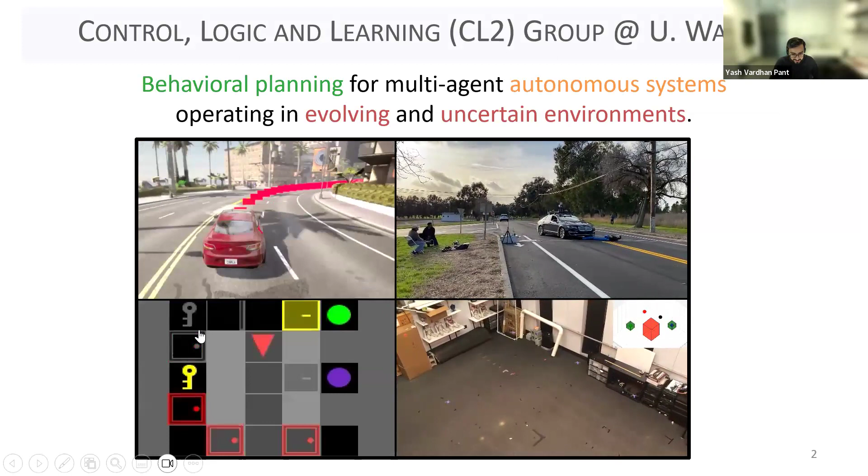As Rahul said, I run the Control, Logic and Learning group—the order of the L's doesn't matter—at the University of Waterloo, where we focus on behavioral planning for multi-agent autonomous systems with complex objectives, operating in evolving and uncertain environments. The video shows a few examples of things we've been working on, across three research or application areas.

Oh, I draw on tools from— sorry, your audio might be breaking up. Maybe you can check it or turn off the video. Let me see, it seems to be okay now. I'll turn off the video—is that any better? Yeah, try. Go ahead, okay.

So yeah, we draw on elements of control theory, formal methods, and machine learning to work on these three problems. Today's talk is going to be mostly focused on multi-robot and autonomous system problems.

The motivating problem for what we're looking at is the scenario of urban air mobility, this near-future scenario where we'll have hundreds, if not thousands, of manned and unmanned autonomous aircraft systems operating in dense, cluttered urban environments that are evolving and will have a whole host of rules applied on these airspaces.

In today's talk, I'll first look at how we formalize the type of requirements we expect these autonomous systems to have with temporal logics. I'll introduce signal temporal logic, and then formally introduce what the motion planning problem looks like with STL specifications. Then I'll move on to the problem of robust multi-agent motion planning with signal temporal logics—how do you actually solve this motion planning problem.

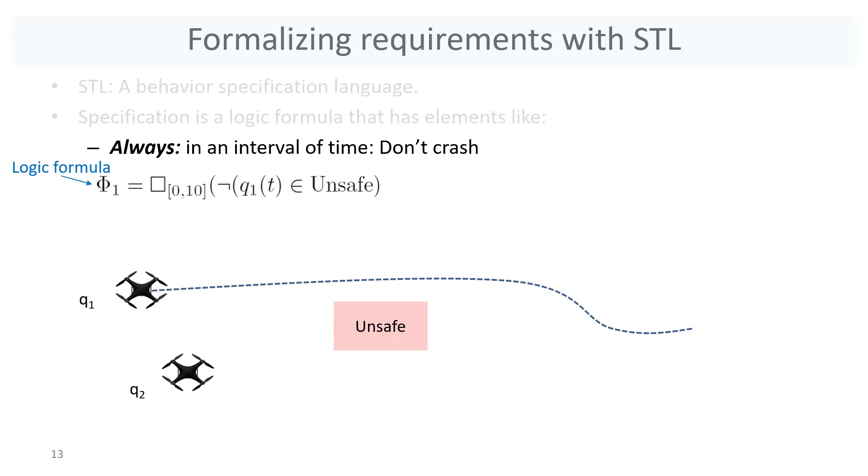Let's say their positions are Q1 and Q2, and my requirement is that I don't want them to crash. I can encode that using the always operator in STL. So a logical formula phi1 that at the end of the day will evaluate to either a Boolean true or false. In this case it's evaluated based on the always operator, which is active in a time interval of 0 to 10 seconds, where I'm saying that I do not want, so that's the logical negation, the position of quadrotor 1 to be inside the unsafe set.

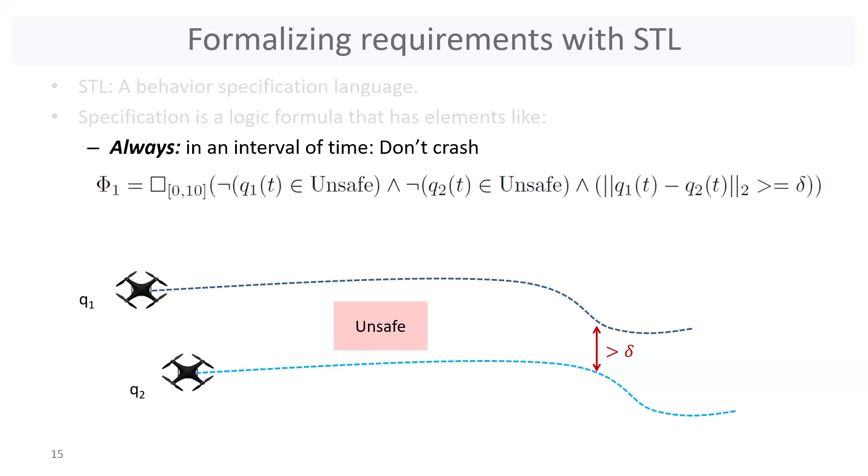This notion of a position or a variable being inside a set or meeting some inequalities is what we call an atomic proposition, the smallest building block of an STL specification. I can also say the same thing for the second quadrotor by using the logical and, or conjunction. And I can also encode requirements such as that I don't want these two quadrotors to be any closer than delta meters to each other. So we can encode safety requirements pretty naturally in STL.

You can also have requirements that require the robot to do something more than just being safe. For example, with the eventually operator, we can say things like, within some time interval, I want these two quadrotors to reach a goal set. Imagine they're trying to do a package delivery type of problem, where this formula phi2 is now saying, we look at the eventually operator, again acting in the range of 0 to 10 seconds, but I want quadrotor 1 to be inside the goal.

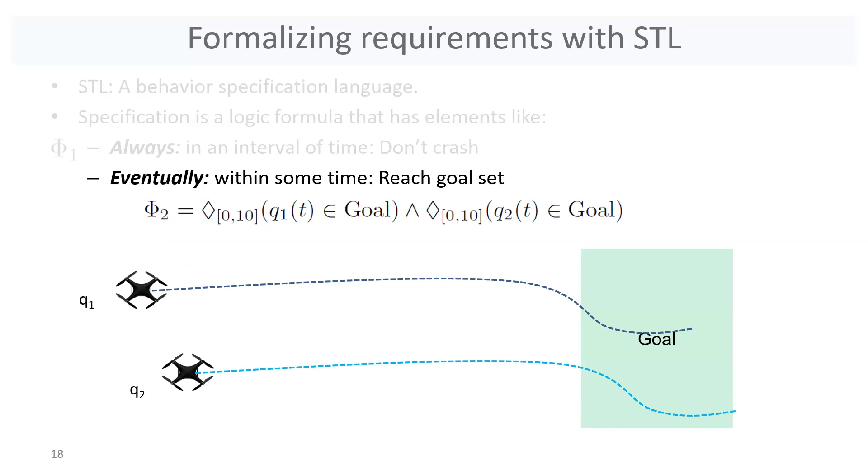And also eventually within time 0 to 10, I want quadrotor 2 to be inside the goal. So at any point in time between 0 to 10 seconds when quadrotor 1 reaches the goal, the first part of the specification is true. And similarly, if quadrotor 2 reaches the goal at any point within 0 to 10 seconds, the second part is true. The logical AND of them will result in the entire specification being true only when both robots hit the goal set. We can also have if-then type of requirements in STL.

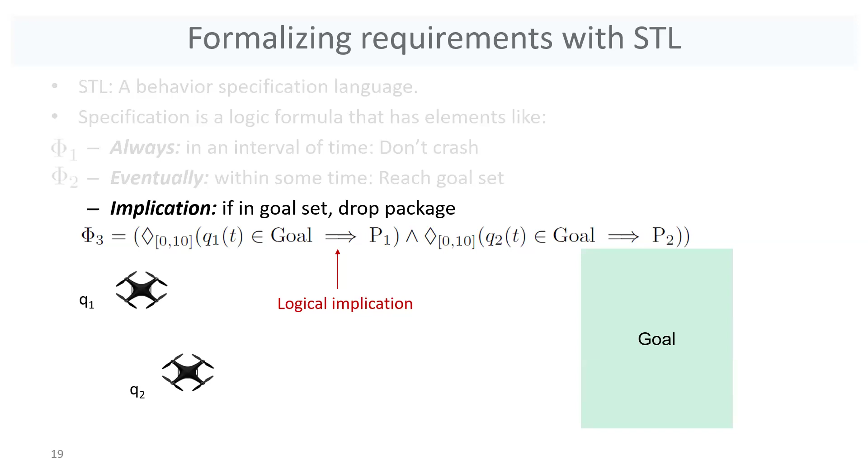Shown over here is an example of using a logical implication, which says eventually within 10 seconds, quadrotor 1 being inside the goal should imply that it's dropped package P1. And similarly for the second quadrotor.

Now in STL, we can take these individual specifications, put them together, and we can nest operators. We can do a whole lot of tricks, and we'll see a few examples later on. But let's say I put them all together using the logical AND. So I get a mission that says, be safe, reach a goal set, drop a package when you get there. That's the specification phi, and the specification has a time horizon to it. For each of these operators, you would have noted that they were active between a time interval of 0 to 10 seconds.

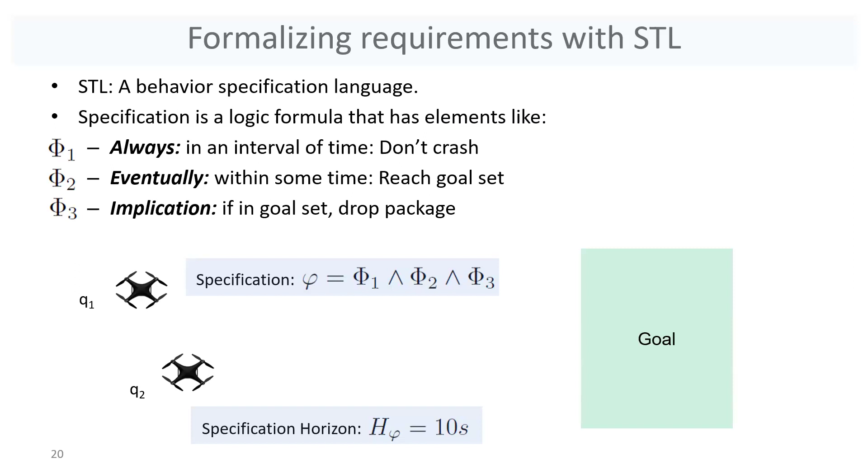So I have a specification horizon of 10 seconds, which means I need two quadrotor trajectories of duration at least 10 seconds before I can evaluate the specification to be true or false. So that was a quick introduction to how signal temporal logic can be used for reach-avoid type problems.

We'll of course look at richer problems later on, and in fact STL can encode a whole lot of complex behaviors very naturally. But now let's assume we know how to encode our requirements in STL. The question is, how do we make these robots actually satisfy these requirements? That's our motion planning problem.

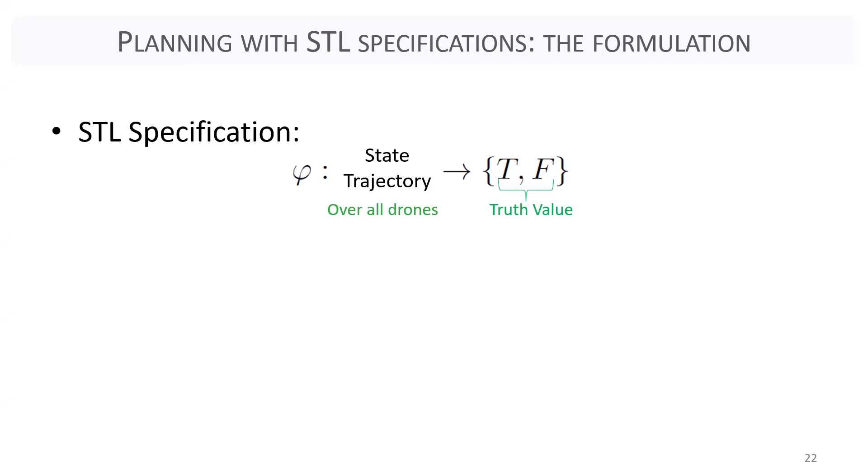So an STL specification, if we were to think about it as a function, it takes in the continuous, real-valued trajectories over all UAVs or all autonomous agents and maps it to a single Boolean true or false value. True if all parts of the specification are satisfied, otherwise it's false.

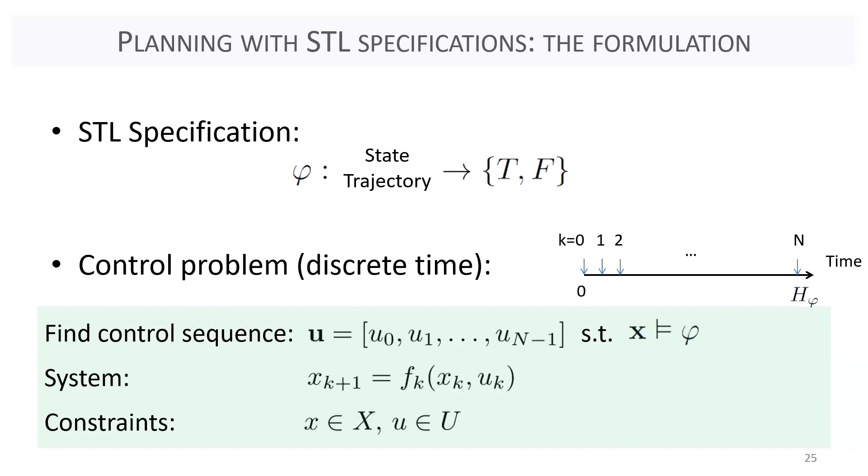Our control problem then can be thought of as a finite horizon discrete time problem, where I take my specification horizon from, let's say, 0 to 10 seconds, as in the previous example with two quadrotors, and I discretize uniformly in time. What I want then is a feasible solution to this problem, where I want to find a sequence of control inputs for each of my robots such that the resulting trajectories over all of these robots satisfies the STL spec, or the STL spec evaluates to true. So that's what that notation is saying.

Of course, I want to make sure that I pick those controls such that the trajectory respects the UAV dynamics. There's no point picking controls that the robots can't actually fly out. And also, I want to do this while respecting constraints on the system, such as robots having a maximum thrust, maybe upper or lower bounds on velocity, accelerations, orientations, and so on.

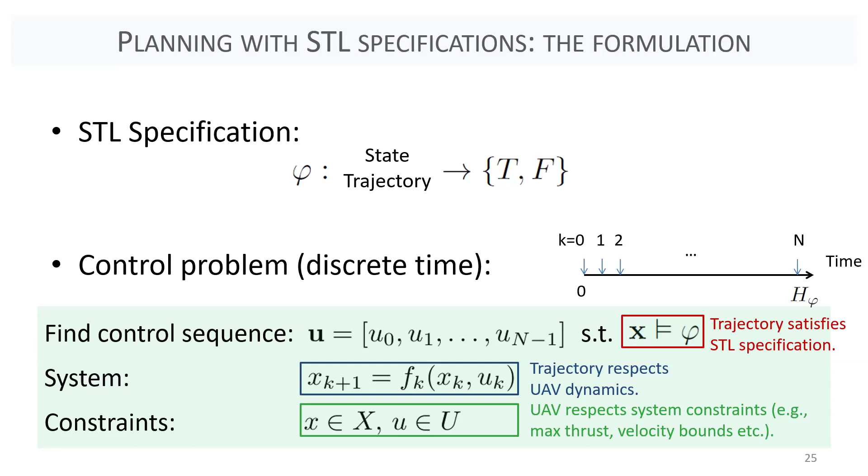So if I can find a solution to this problem, I've solved the problem of generating trajectories that satisfy STL specs. But of course, the challenge is how do you encode this particular problem in a way that it can be solved efficiently? In order to take a look at that, we'll have a very coarse-grained look at some of the related work.

So the most popular line of work in coming up with controllers to satisfy STL specifications is to turn the problem into a mixed integer programming one, where the idea is you introduce binary variables for the smallest building blocks, or the atomic propositions, that say whether a state was inside a set or not. Then there are ways of automatically generating mixed integer constraints such that if you satisfy those constraints, you've satisfied the underlying STL specification. One of the challenges is that these usually rely on mixed integer linear programming as the underlying solver, so they're restricted to linear systems.

We've shown in some of our previous work, and this is by now well known, that these methods do not scale well because mixed integer programming itself does not scale that well. And they also produce solutions that have a problem of zero robustness. We'll define robustness later on, but that makes them difficult for implementation in a realistic system.

Another way of solving these problems is to actually abstract away the continuous part of the dynamics and work with a discretized workspace with simplified motion primitives. There are challenges here as well, that these methods do not scale as you add multiple agents, or especially if you have three-dimensional workspaces. And also the type of specifications or problems you can encode and solve with these methods are relatively limited. So there are some references on this.

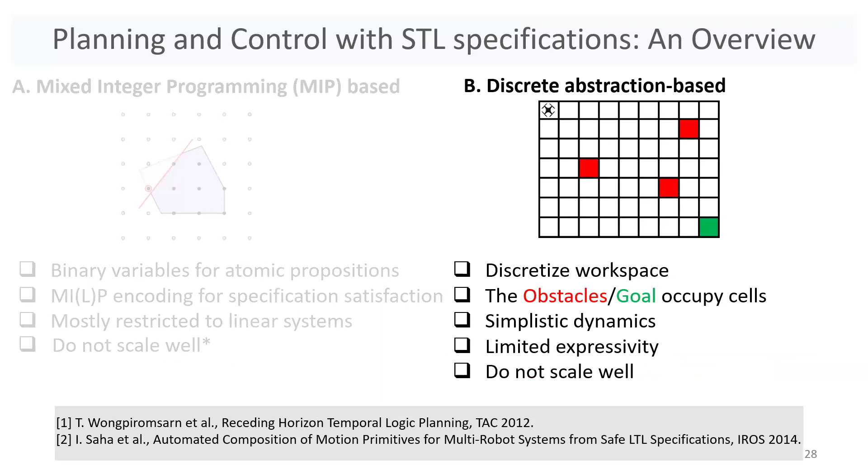So at the heart of it, the state-of-the-art approaches, or at least the most common ones, are combinatorial approaches that do not scale, and this kind of motivates what we want to do. I would be remiss if I did not talk about some more modern methods. So people have looked at solving this problem via reinforcement learning. The challenge there is that, of course, it relies on breaking the problem down into a very simple, discrete abstraction. It's also limited in the type of specifications we can have.

There are methods that can turn this into a purely convex optimization-like problem. But the challenges there are that they again rely on high-dimensional polyhedral projections, which means if you have a complicated specification or a long time horizon, these methods just don't work computationally.

At this point, I think the methods finding the most applications in this area are based on control barrier functions. But their limitations are that first, they rely on handcrafted control barrier functions, and also they're limited in the grammar of STL or the types of specifications we can encode or solve for using control barrier functions.

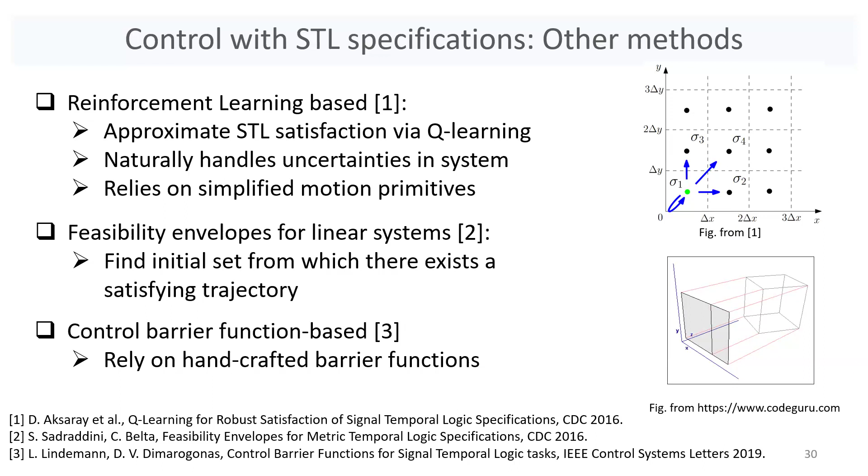So anyway, with that, we can move on to the core idea behind our approach, which is that instead of solving a combinatorial problem like a mixed integer program or a graph search or finding a policy over an automata, what we want to do is solve a continuous optimization problem.

And in order to do that, we rely on the notion of the robustness of an STL specification. Associated with signal temporal logic, just like we have the Boolean semantics that map a trajectory to true or false, we also have robust semantics, which rather than having a discrete outcome, gives us a robustness function that can be automatically constructed from a given specification. It takes in the same input as the specification, your real valued trajectories, and maps it to the extended real line.

This mapping has a nice property: if the function evaluates to a strictly positive value, it means the underlying specification is satisfied. Otherwise, it's not.

So we're going to rely on this notion of STL robustness, which we can also interpret as a degree of mission satisfaction. So if you have large positive robustness values, it means you can tolerate a lot of deviations or disturbances at runtime, for example wind or even small failures.

On the other hand, if you have very negative values of robustness, it means you've done a great job of violating the specification, which for our problem is a bad thing. And if you have robustness close to zero, then any small disturbance could make your system violate a given specification, which is usually the problem with mixed integer programming based solutions.

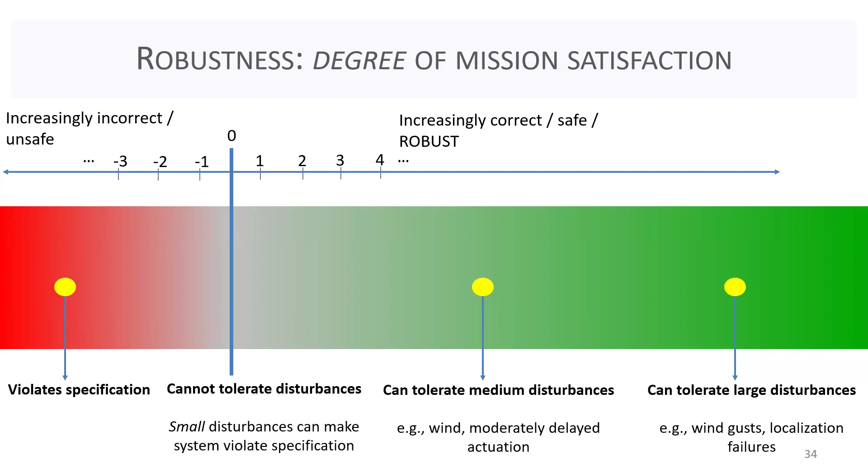Before we get into how we actually generate those trajectories, let's take a look at how we build this robustness function through one example. My example would be that of a safety specification.

So the specification says that always in a time of 0 to 10 seconds, I don't want quadrotor 1 to be inside this unsafe set U1 or to be inside this unsafe set U2. So it's a simple safety specification.

What we can also do is, following the robust semantics of STL, build up the robustness function, where based on this always operator, we have a corresponding minimum operator going over this time range of 0 to 10 seconds. Corresponding to the logical OR, I have the max operator showing up. There's a minus sign here because of the negation.

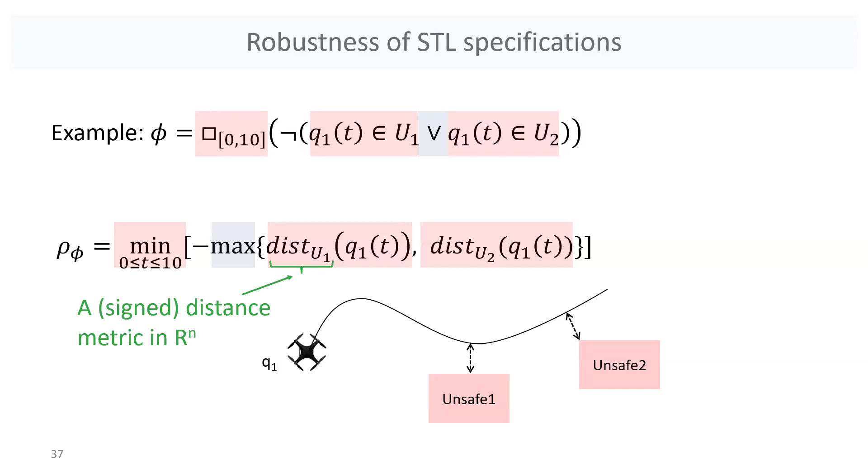And then in order to quantify how well my atomic proposition, the position being inside a set, is being satisfied, I have to introduce a distance metric. We usually introduce a signed distance metric, which could be in some n-dimensional space. And then if I plug my trajectory into this function rho of phi, I'll get a real valued output from it.

In fact, we can build such a function for any STL specification automatically. So that's just following the robust semantics.

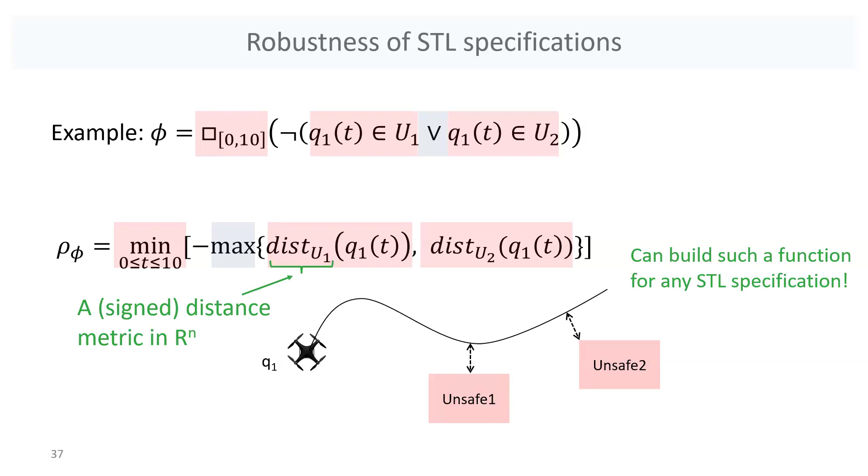And if the resulting value, let's call it R, takes on a strictly positive value, a physical interpretation of that is that I can build a tube of radius R, where this radius is with respect to the same distance metric we're using here, such that all trajectories that lie inside a tube of radius R are going to satisfy the specification.

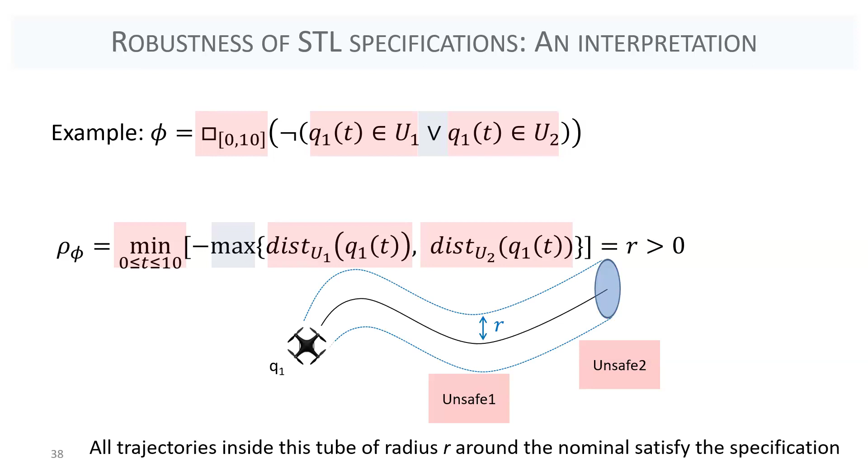So which means if I plan out a trajectory as shown by this black line, but I have disturbances in the system, as long as those disturbances don't push me outside of this tube, I'm guaranteed to satisfy the STL specification. Which is why this is naturally called a robustness function.

So this robustness function, we know large values mean you've satisfied the specification. The more positive values you take, the more robustly you've satisfied a specification. So intuitively, all we want to do is find trajectories that maximize robustness. We have an algebraic expression for robustness as well, so we could throw it to an optimization solver.

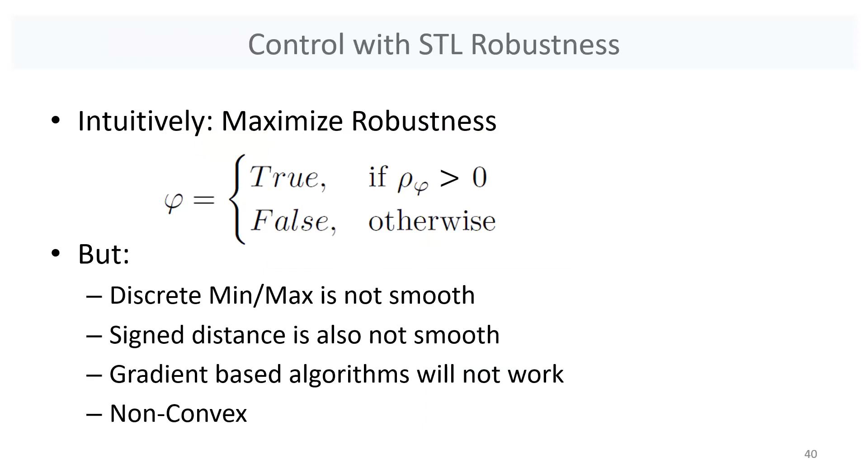But it turns out we can't just do that in a straightforward way. There are some challenges. The first is that this robustness function is not smooth, because of the discrete max and min operator we have discontinuities in it. Also, the signed distance operator is not necessarily smooth. So gradient-based approaches do not work.

So we're back into a problem of mixed integer programming, which does not scale. Also, robustness functions for any interesting specification are going to be a non-convex, or non-concave function. So maximizing it is not going to be straightforward.

One of our earlier works actually addressed the first three problems, and we came up with this continuously differentiable notion of robustness, which we call smooth robustness. So going forward, we'll assume that given an STL specification, I have a smooth robustness function associated with it. Smooth here just means it's continuously differentiable, so gradient-based approaches can be applied.

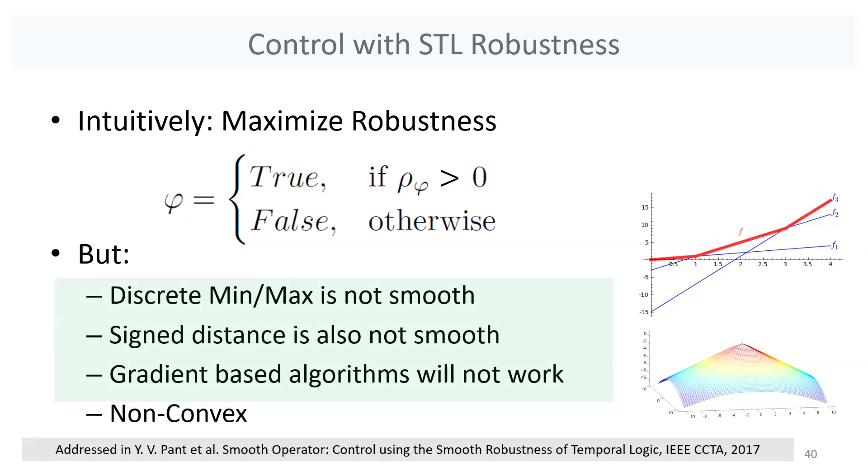One of the methods that exploits this smooth robustness was a work we did called flyby logic. The fly here tells us that its applications are based on aerial robotics. What we want to do is come up with an optimization that is non-convex, but still efficient, something we can solve efficiently based on maximizing smooth robustness through the problem of only selecting waypoints for robots.

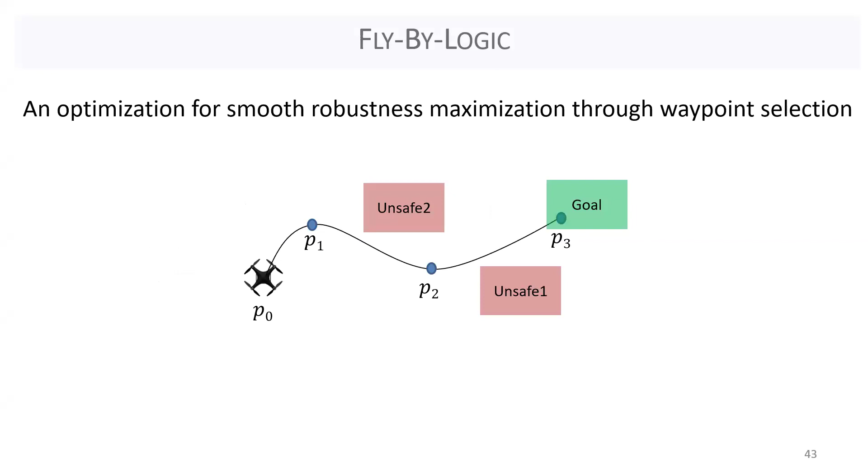Smooth robustness is a function that has a nice property: if it evaluates to a positive value, or a value greater than a positive threshold epsilon, it means the underlying specification is going to be satisfied. What we want is not to find low-level control signals like roll, pitch, yaw, and thrust for the robot, but only find high-level, lower dimension waypoints such as positions and velocities, and that too in a sparse manner through the map, so that our resulting trajectories can satisfy the specifications.

Flyby logic is actually a way of encoding this so that we get strong guarantees on the solutions we get out of our optimization. So the problem setup is as follows.

Our optimization variables are n+1 waypoints per UAV. Think of each of these waypoints P0, P1, and so on as uniformly apart in time. For example, it takes 1 second to go from P0 to P1, 1 second to go from P1 to P2, and so on. So if I know the specification horizon in seconds, I need n such that n times TF, which is the time between waypoints, should be greater than my specification horizon.

But just having these low frequency waypoints is not going to be enough. I also need to think about how these waypoints are being connected by the robots when they actually fly it out. We're going to connect these waypoints using jerk minimizing splines for multi-rotor robots, a work published by Mueller et al. from ETH Zurich in 2013.

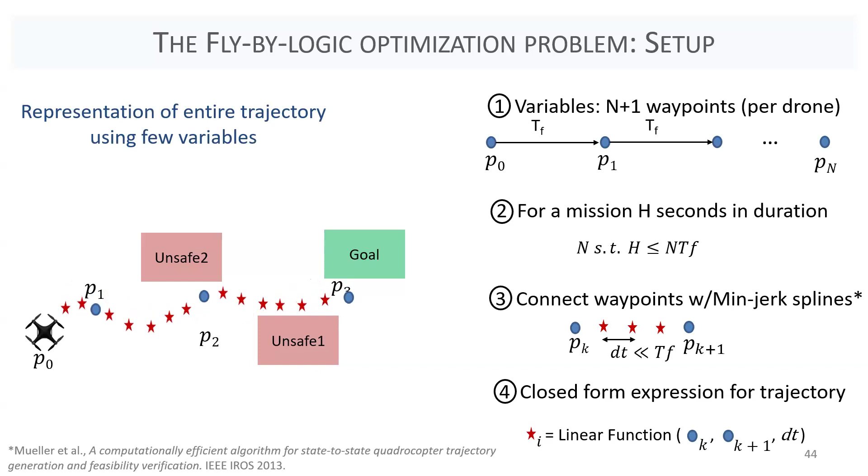There's a lot of linear algebra that goes into it, but in the interest of time I'm going to skip that. With this, we can formulate our optimization problem, the flyby logic optimization. It's a centralized optimization, solved over the variables for all the drones, even though I explained this only using a single UAV in my examples. But if I had multiple UAVs, just imagine I have a copy of these waypoints for each of the UAVs.

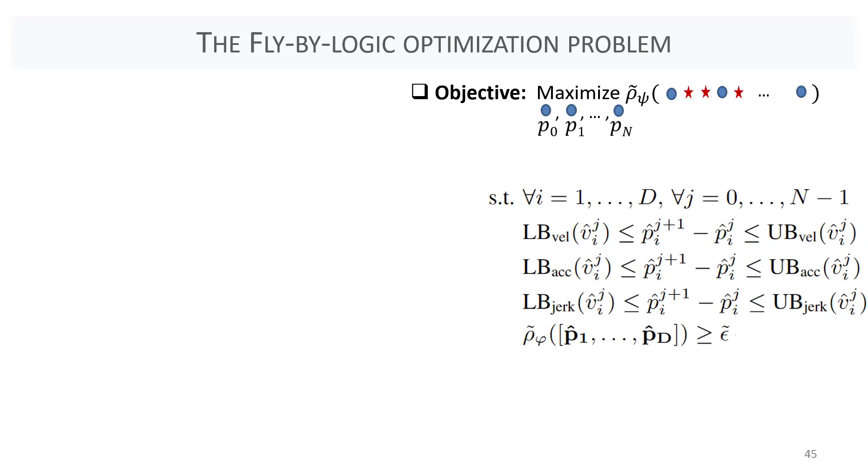So the waypoints are going to be our optimization variables. What we're going to try to maximize is the smooth robustness over these high frequency trajectories that we saw in the previous slide, over all the UAVs.

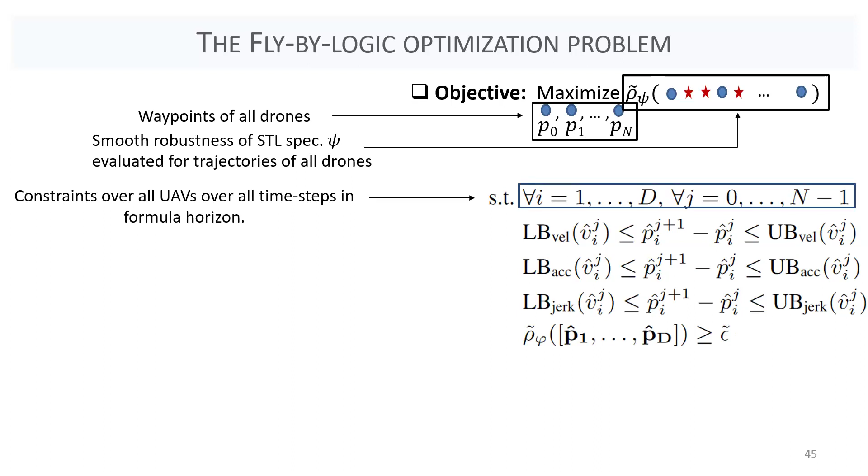For each UAV, at each time step, I'm going to have a constraint or a set of constraints. It turns out I have constraints only on how far away successive waypoints can be from each other. And what I work out are functions LB and UB for velocity, acceleration, and jerk, which turn out to be linear functions in the velocity at the waypoint at which you started off.

So what we have here is, if my waypoints satisfy this constraint, then I have these linear functions that tell me my velocities, accelerations, and jerks are going to be within given upper and lower bounds. One of our main contributions was actually proving that these constraints work.

Finally, the last constraint here is that in order for the optimization to actually find trajectories that satisfy the specification, I want the smooth robustness to be over some positive threshold, epsilon tilde. In general, this is a non-concave optimization.

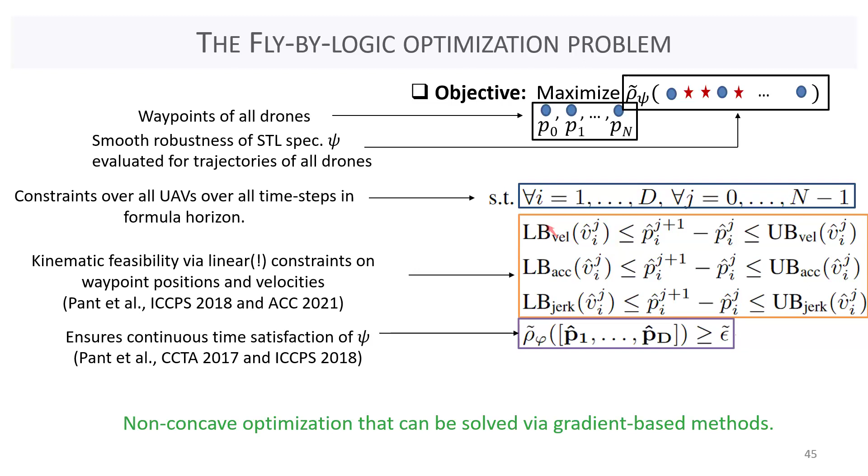So based on any STL specification of interest, like the one we saw for the two UAVs trying to deliver a package, that would result in a non-concave objective to be maximized. But because we have very few variables and nice linear constraints, this can actually be solved via gradient-based methods, and we'll show the experimental results in the following slides.

If I find a solution to this optimization, what I've done is generated trajectories that give guarantees on continuous time satisfaction of the underlying specification. That is, even though I work with just these waypoints that are seconds apart, the continuous time trajectories are still going to satisfy the underlying specification.

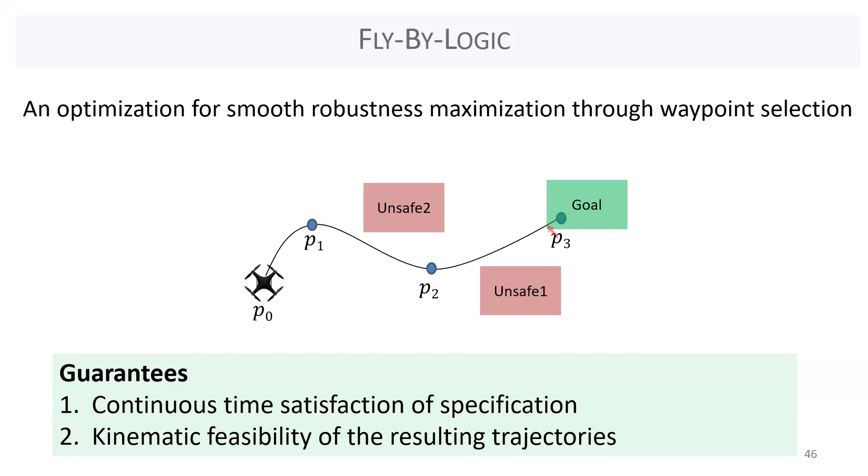Also, these continuous time trajectories are going to be kinematically feasible. That is, if I know my robot can track trajectories with bounded velocities, accelerations, and jerks within given bounds, these trajectories will respect those bounds, so they can be flown in a straightforward manner.

Now we'll look at experimental results that show how well this works in practice. A benchmark problem is a simple reach-avoid one, where I have multiple UAVs, let's say capital D UAVs. All of them should avoid an unsafe set, shown here, and should eventually reach a goal set, shown on the far side, while making sure these UAVs don't crash into each other. There are also other velocity and acceleration constraints which I'm not showing here.

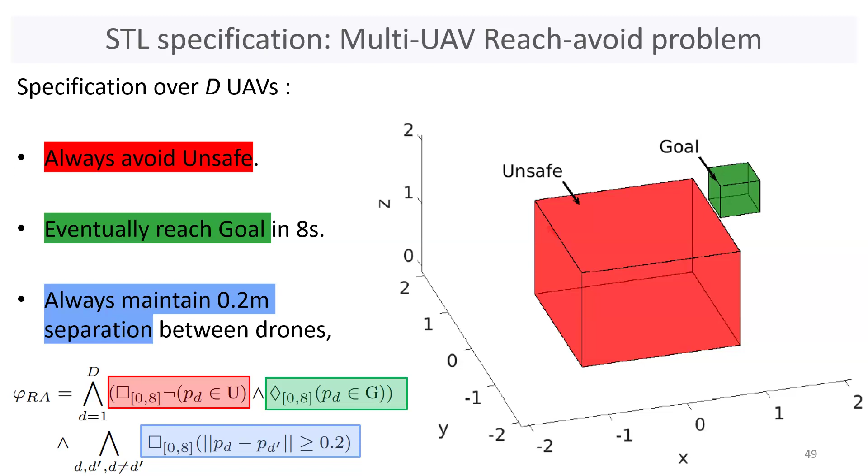So a reach-avoid specification like this can be encoded as shown below in an STL specification. The highlighted parts with different colors correspond to different parts of this objective, like avoiding an unsafe set, eventually reaching a goal set, and also always maintaining at least a minimum distance between the UAVs. Something like this we can solve using Fly-by-Logic.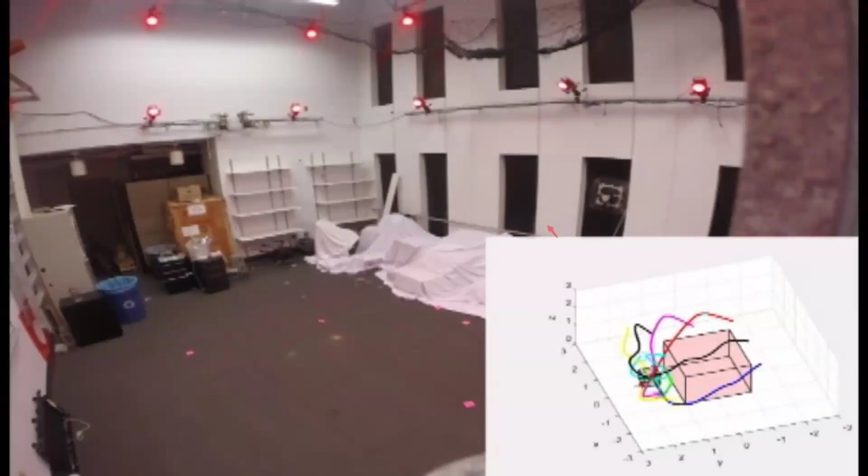Those guarantees are actually encoded in theorems, which I won't talk about here. One of our main objectives was to come up with a method faster than mixed integer programming, that is, computationally more tractable. These results are already 5 years old, so now the methods have gotten much faster, but the trend still holds. What you see here is, for this particular reach-avoid problem, the amount of time it takes for the optimization to terminate.

As you increase the number of UAVs, you see that our method, shown in blue, does slow down, but it looks like it's slowing down almost linearly with the number of drones. If you know anything about STL and mixed integer programming, the problem is actually exponential complexity, so empirically this linear result looks really nice.

The mixed integer programming based method actually doesn't scale very well. It works really fast for one robot, okay for two robots, but as you go up to four robots, the optimizations would time out, taking more than 5 hours to solve. At that point we just stop. So this tells us that our method does indeed work computationally as expected, that it's fast.

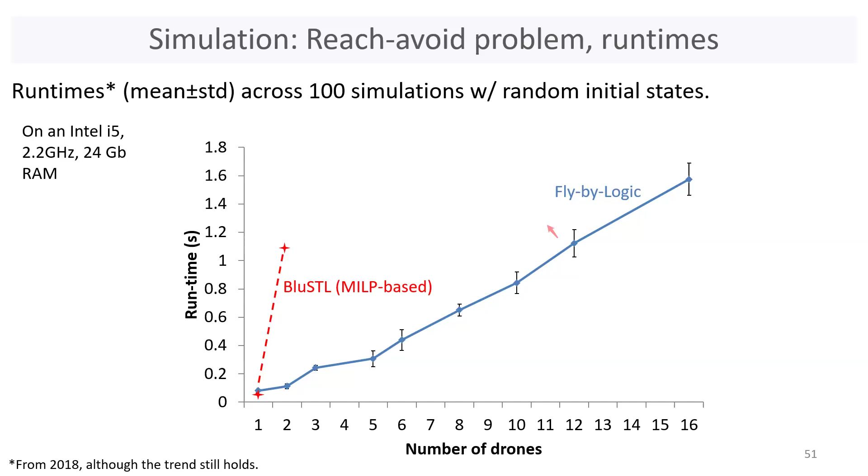But that was a simple example. How do we actually get to much more complicated missions with longer horizons and richer STL specifications? How can we still solve for them? The answer is yes. But first, let me introduce what I mean by more complex behaviors.

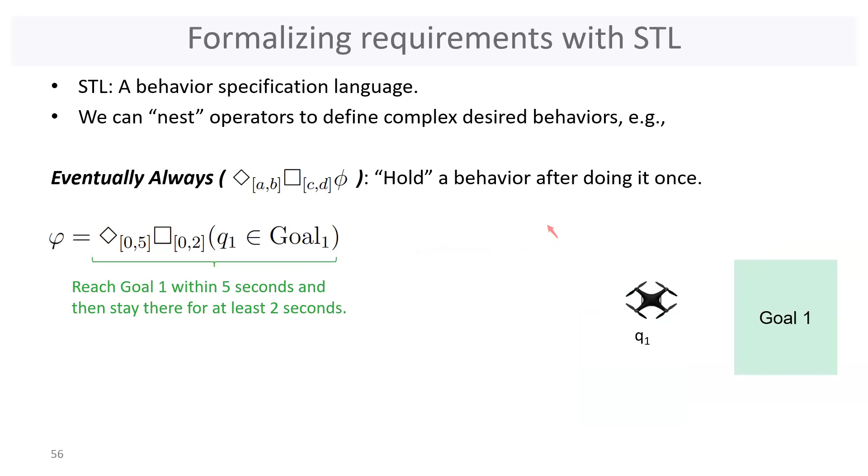You can also have another type of nesting, eventually-always, which says I need to hold a behavior after doing it once. An example here is that the robot reaches a goal set and then stays there for the next 2 seconds, resulting in a trajectory that either stops or loops within goal 1. Something like that can also be encoded using STL.

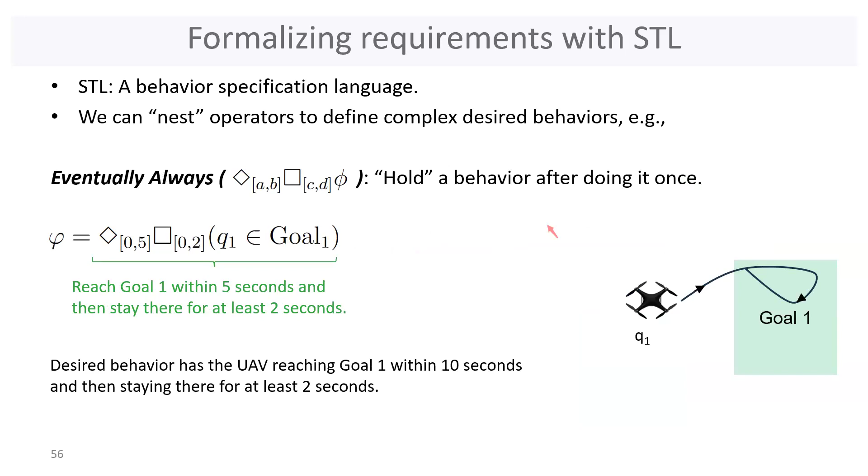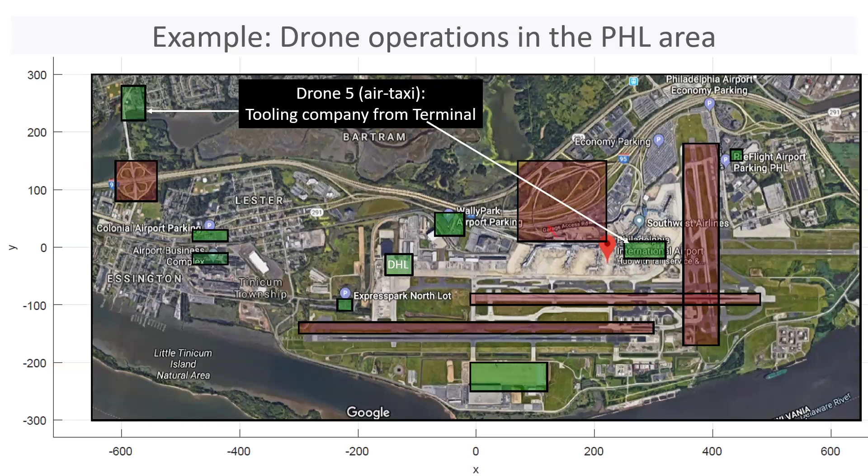In this particular mission there are 5 UAVs. One is doing a loop picking passengers up from a parking terminal and taking them to an international terminal. There's another UAV doing the same thing. UAVs 3 and 4 are doing package delivery from the DHL part of the airport to a nearby business complex. And then there's a taxi, UAV 5, which picks up a passenger and goes to a particular area. All of this can be encoded in what looks like a very large STL specification.

Our method can generate trajectories that do indeed satisfy these requirements. Shown here are the simulated trajectories being flown out. This video is sped up 10x; the actual horizon of the specification was on the order of tens of minutes.

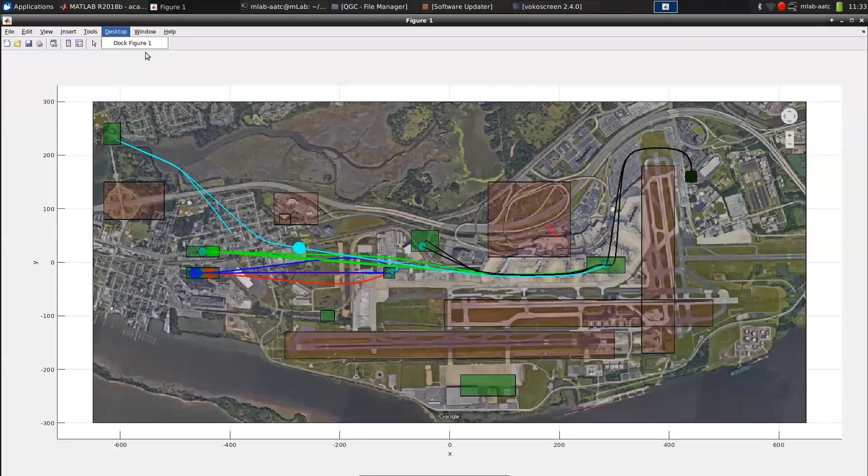You see this behavior where the robots go inside these green sets, and then you see them waiting there for a while — that's because of the nesting of operators. So the robots go back to DHL, pick up more packages, fly out to the business complex, repeat it, and so on. Our proposed method is not only for toy problems, it can also scale to these larger motion planning problems.

So what we've studied so far is a centralized optimization method to generate trajectories for multi-rotor robots such that they satisfy STL specifications.

We only so far aimed for kinematic feasibility, but as robots get heavier or fly more aggressive trajectories, we need to go beyond kinematic feasibility and make sure we're generating trajectories that can be tracked by our lower level controller as well.

The other part of the work I did a couple of years ago was coming up with both the trajectory planner and the tracking controller via a co-design, such that we have even stronger guarantees than what we had in the Fly-by-Logic work. Fly-by-Logic only generates kinematically feasible trajectories. Now we're going to try to go beyond that.

The key idea is to bring our tracking controller together with a trajectory planner. The trajectory planner, again, is Fly-by-Logic. It's going to generate trajectories that satisfy kinematic constraints, and it's also going to give us a robustness value. That robustness value serves as a bound on the worst case tracking error for a tracking controller.

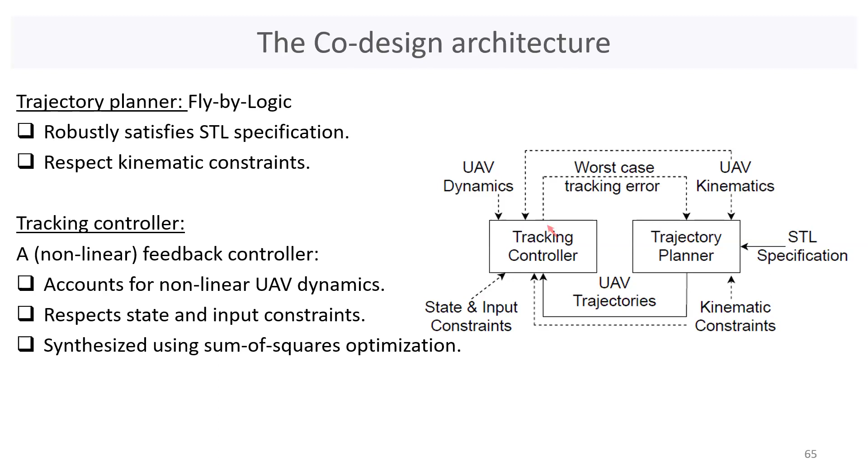In this tracking controller, we take into account the full nonlinear UAV dynamics and synthesize a feedback law. It's going to be a nonlinear feedback controller that respects the UAV dynamics, state and input constraints, as well as have an upper bound on the tracking error. So there are two components - I'll try to go through this quickly in the interest of time and won't get too much into the details.

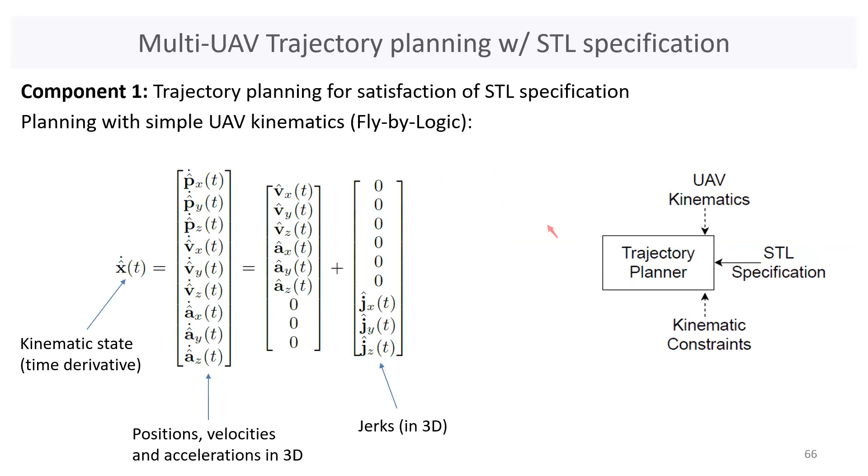The trajectory planner, again Fly-by-Logic, takes in the UAV kinematics, the STL specification, and constraints on, for example, accelerations and jerks. It works with a simple underlying kinematic model for 3D motion for each UAV.

The second component we're now designing is new - a tracking controller that looks at the full nonlinear UAV dynamics. Examples of those are shown here - terms like mass and moment of inertia show up for the robot. It's a standard UAV model with 8 states.

We're going to design a controller to minimize a notion of error. This error is computed over the trajectories that the planner created - position in X, Y, Z created by the planner, versus the positions of the actual system in X, Y, Z, similarly for velocities. And it tries to minimize essentially the roll and pitch angles.

By looking at this particular error, we can work out control affine error dynamics for the system. As shown here, this E dot is some function of E and U, and also X hat, which is the input from the planner trajectory.

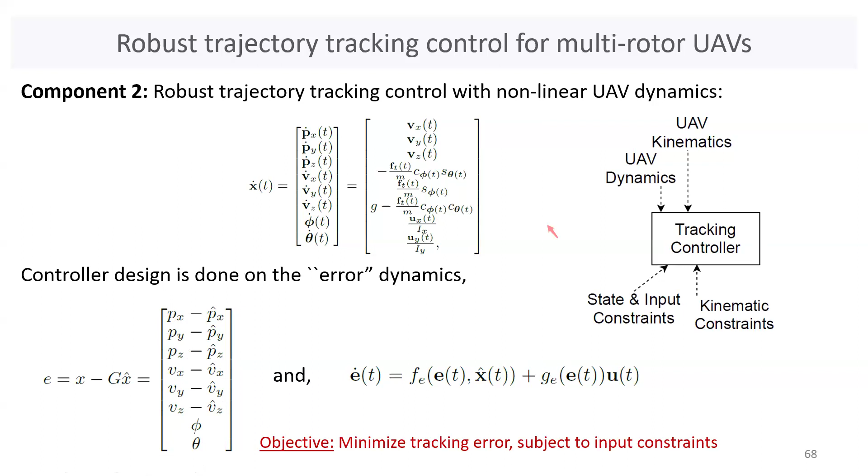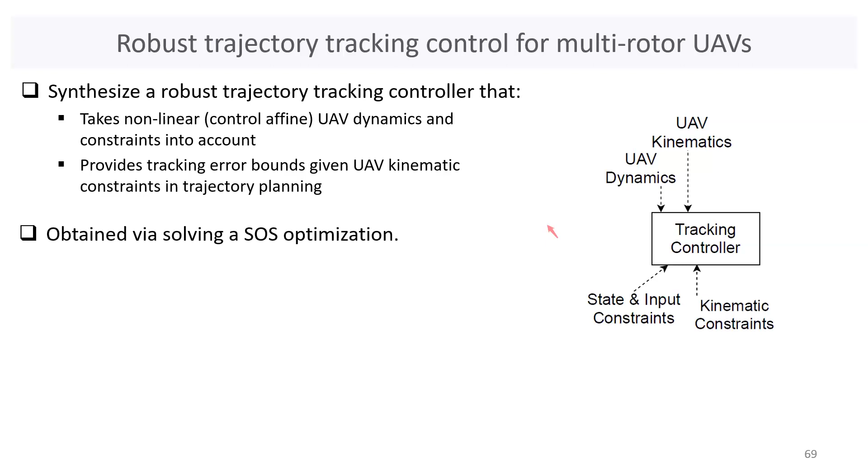Now we want to minimize this tracking error subject to the input constraints and the dynamics shown above. A problem like this can actually be formulated as a sum of squares optimization. We'll use those tools to synthesize a robust trajectory tracking controller that respects these bounds and takes in the constraints, synthesizing that law using sum of squares optimization.

The guarantees we'll have are an upper bound on tracking error. We actually have a time varying function for tracking error, but we can find a global upper bound delta for that. Also, our control law KE is going to be such that as you feed in errors, it only computes control inputs within given bounds U bar and U lower bar. So we have strong guarantees on this construction.

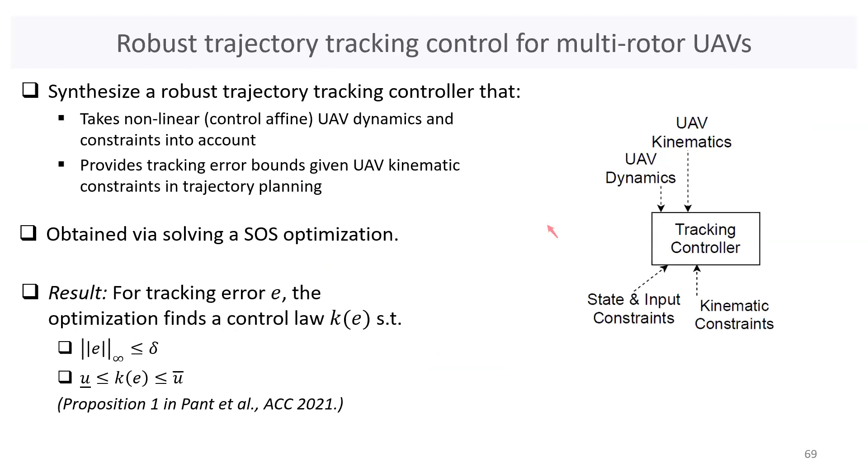For Fly-by-Logic, we take delta - the worst case tracking error from our controller - and add that to the lower bound of robustness we were looking for. It turns out if we can find a satisfying trajectory more robust than epsilon tilde plus delta, then the resulting closed loop system can track these trajectories using controller KE, have continuous time STL satisfaction, and have UAV kinematic constraints respected. This is all formalized in a theorem we have.

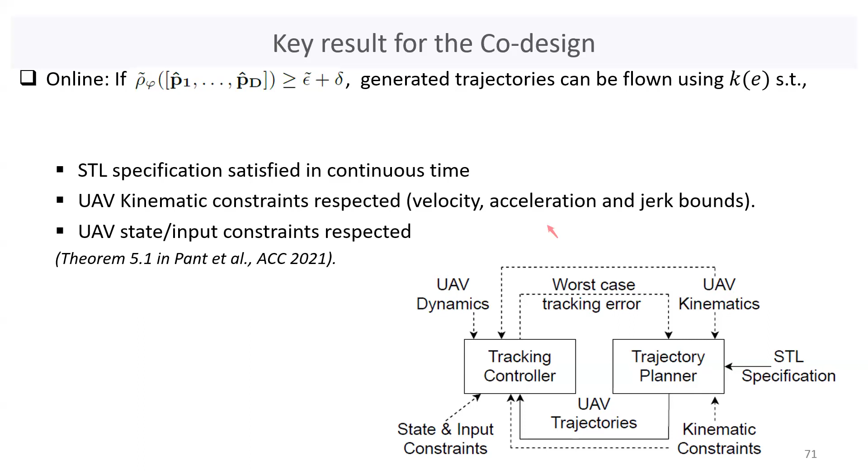Now we have stronger guarantees than just kinematic feasibility - we in fact have dynamic feasibility of these resulting trajectories.

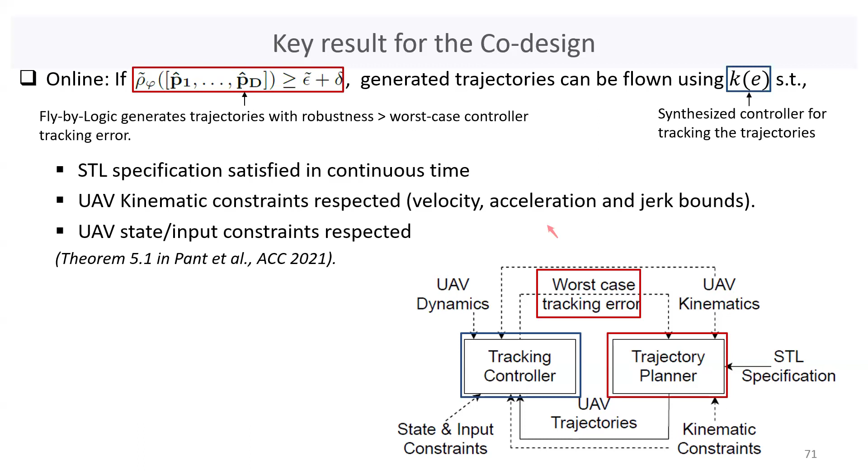And yeah, the trick again is in co-designing this planner and controller together to account for the worst case that the controller would have done. The controller is a nice feedback law, so it doesn't need any computation online. It's just a nonlinear function in closed form.

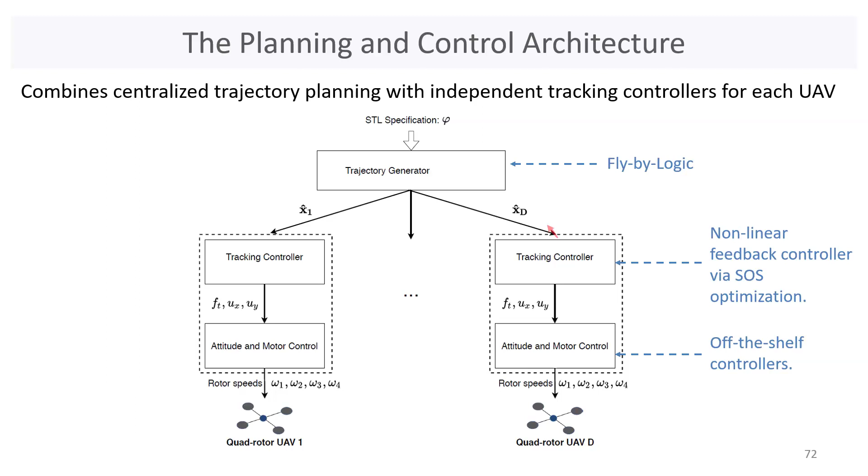The way this would be implemented on a multi-UAV setup is that Fly-by-Logic would run as a centralized trajectory generator to spit out these trajectories that would be tracked on each robot running this nonlinear feedback controller that we just synthesized using sum of squares optimization. It will generate essentially a thrust and a desired roll and pitch angle that can be tracked by off-the-shelf controllers like PID controllers running on the robots that, in fact, for our experiments, we didn't even have to retune.

So I'll show you a simulation case study that shows this in action. This is over 4 UAVs. Think of them again as in teams of 2 each.

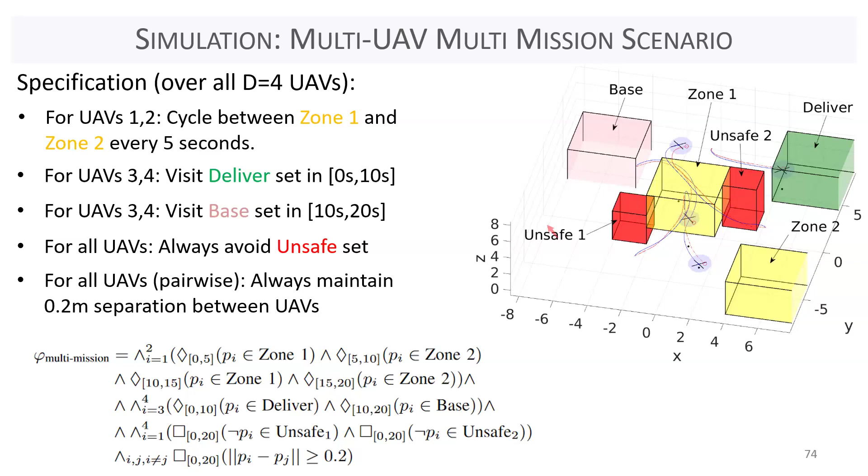And this can be encoded in the following STL specification shown below. So again, writing these STL specifications does take some domain expertise, but once you write down the STL spec, the rest of the method is automatic. We automatically generate the objective, the constraints are formulated, even the low-level controllers are going to be synthesized using sum of squares optimization. So shown over here are 3 views of this particular simulation, including a top-down view.

The dashed red lines show the planned trajectories for these robots. The blue lines show the actual trajectories as flown by our tracking controller. You see that they do indeed deviate, but they're always going to remain within a worst case or within a tracking error bound, which is shown with this 3D ellipsoid centered at each of these UAVs. And the X shows the current position and orientation of the UAVs.

What you see over here is that the trajectories are tracked close enough in a way that the resulting 4 UAVs actually end up satisfying the underlying STL specification. And now we have strong guarantees on the fact that we generate trajectories that can be flown and tracked within a bounded error with our given co-design of the planner and controller.

So the good news is that we can indeed track them. One thing we see over here is that the bounds are indeed conservative. So we explored some work using online reachability to tighten these bounds, but it wasn't that huge again, so we didn't really follow that through.

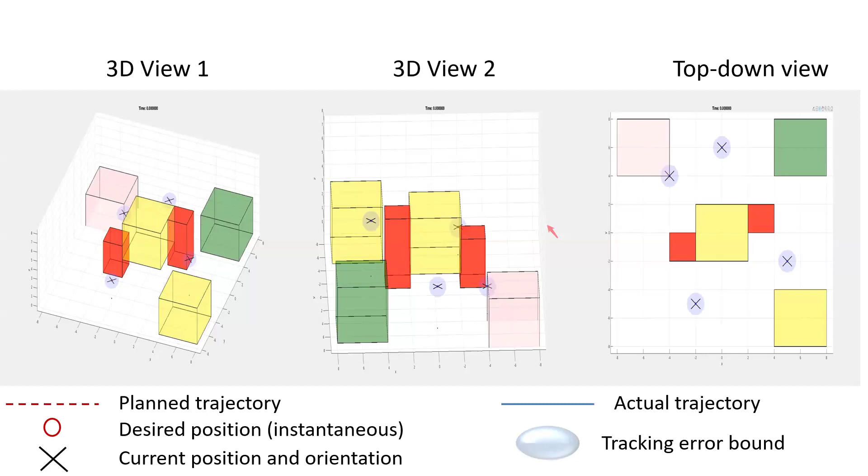Yeah, that's a great question. So in this particular work, we are going with dynamics that we know perfectly. So if there are disturbances, we're not modeling them. The hope is that the robustness is big enough that if you did have disturbances, you still remain within the bounds as shown over here. So yeah, it's a good question. It's not something we deal with directly in this work. If there's time, I'll go through some of the ongoing work where we do talk about unmodeled disturbances and how we can, if we have some samples of what those disturbances look like, we can actually be robust to disturbances like wind.

Turbulence is probably hard to model with the kind of models I'll show you later on, essentially Gaussian processes. But yeah, it's a good question. We somewhat try to deal with it in some of the ongoing work. Okay, thanks. Yeah, thanks, Al.

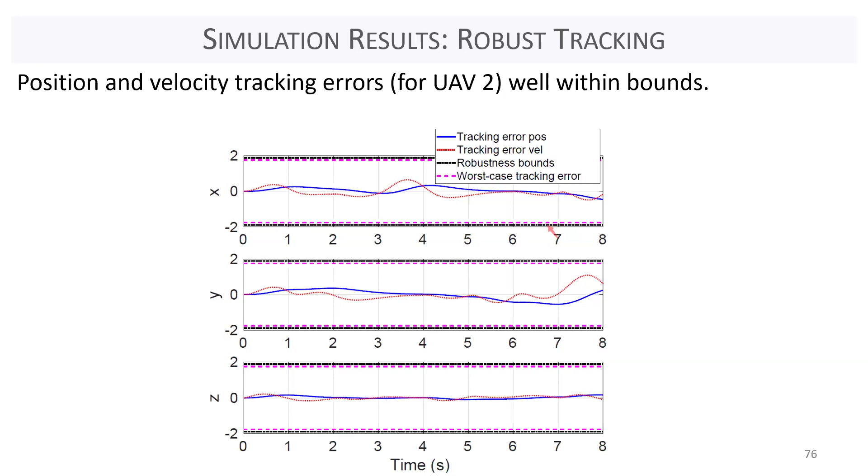In the interest of time, I'll probably skip most of the distributed trajectory planning work, but what we've shown so far were methods that are all centralized. That is, there's a single giant server solving this trajectory planning problem for all the robots and telling them what trajectory to fly. We also developed a method with Rahul and Hussam called flyby distributed logic, which is how you do this trajectory planning in a distributed manner where each robot is free to make its own decisions.

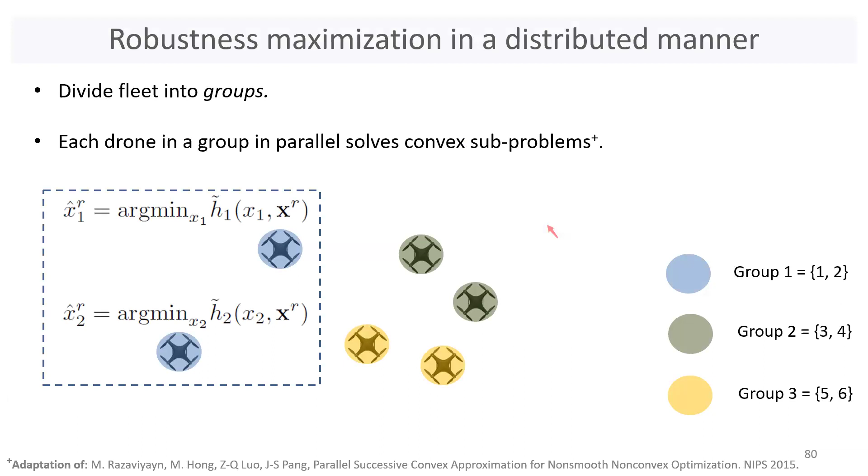So we're trying to solve the flyby logic problem by dividing robots into different groups. I'll skip the technical part, but the idea is each robot solves a simple convex sub-problem, not the original non-convex optimization. After solving this subproblem, the robots share their solutions with each other until some convergence. In fact, we have proofs that our method converges to a stationary point of the smooth robustness function.

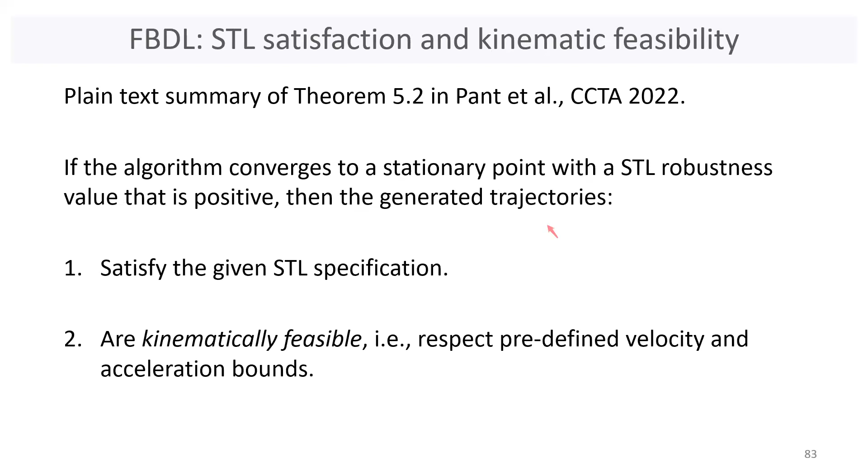We also have another result that tells us that if the robustness is high enough, then we have the same type of guarantees as flyby logic. That is, you satisfy the STL spec and you have kinematically feasible trajectories being generated.

Maybe I'll go through one result. So again, we go back to our benchmark reach avoid problem, where we want these UAVs to reach a goal set within 8 seconds. They want to always avoid the unsafe sets, and they want to make sure they're not crashing into each other.

For something like this, we can solve it using distributed flyby logic. Shown over here is a simulation for 4 UAVs. What you see is that all of them do indeed make it inside the goal set shown in green. They're not flying into the unsafe region shown in the middle, and they're also not crashing into each other. These trajectories also respect the kinematic constraints we had set out to respect initially.

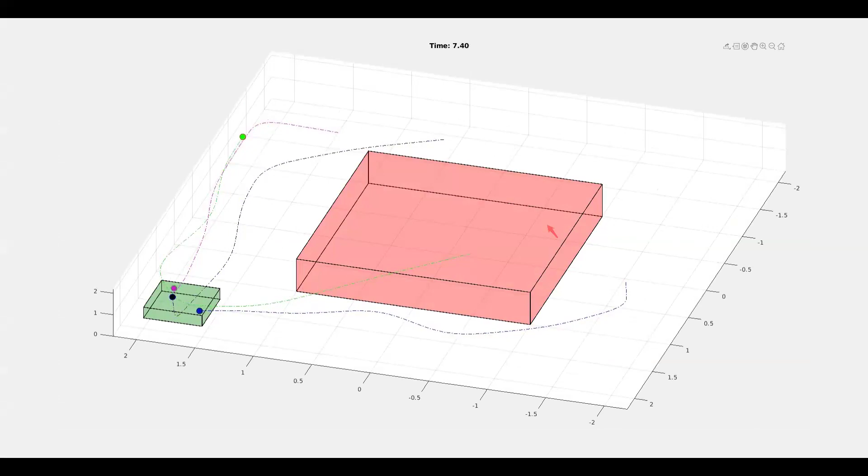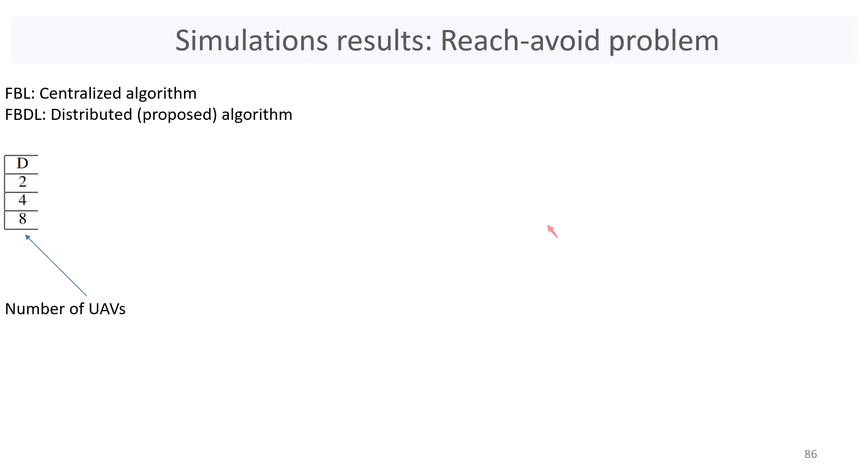What's worth noting is that we're now solving this in a distributed manner, and we're going to do a comparison with the centralized approach. For this benchmark problem, we consider cases with 2, 4, and 8 UAVs. FBL is the centralized flyby logic approach, and FBDL is the distributed version I skipped over. First, we're going to look at the time it takes each of these methods to find a trajectory for each robot such that they satisfy the underlying specification.

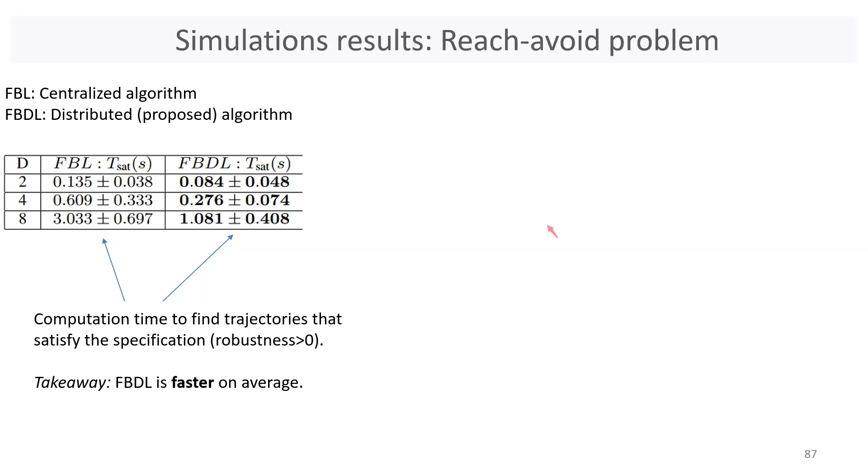So you can see on the left, we have the satisfaction times for flyby logic, and on the right, the times for the distributed method. The trend is that the distributed method is in fact faster than the centralized method when it comes to finding trajectories that satisfy the underlying spec. Even for the time it takes to find solutions with the highest robustness values possible, the distributed method is faster. Take this result with a grain of salt, because the centralized and distributed methods have different convergence or exit criteria, so it's not really a fair comparison, but the distributed method does terminate much faster.

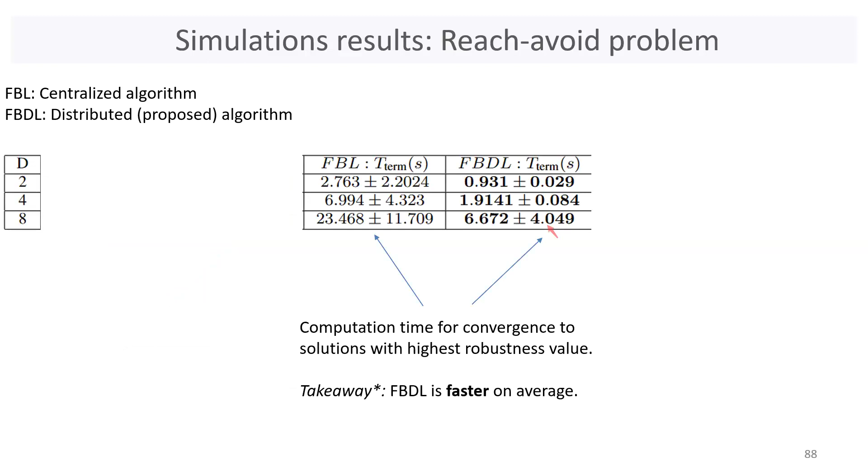What we do pay for, though, is in terms of the robustness of solutions. Flyby logic's guarantee is that we'll end up at a local optima of the smooth robustness landscape. With flyby distributed logic, we only get to an extreme point, which could also be a saddle point. We do see that in practice a bit, where the centralized method results in trajectories that are more robust, meaning they could tolerate larger disturbances than the trajectories generated by the distributed method.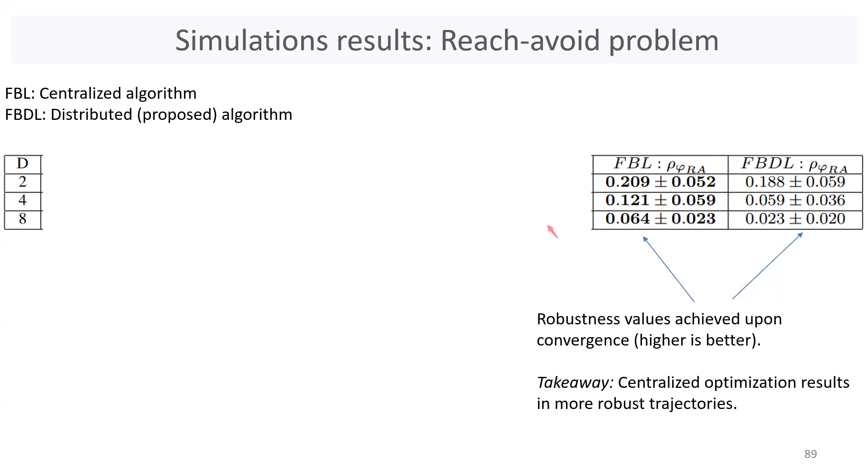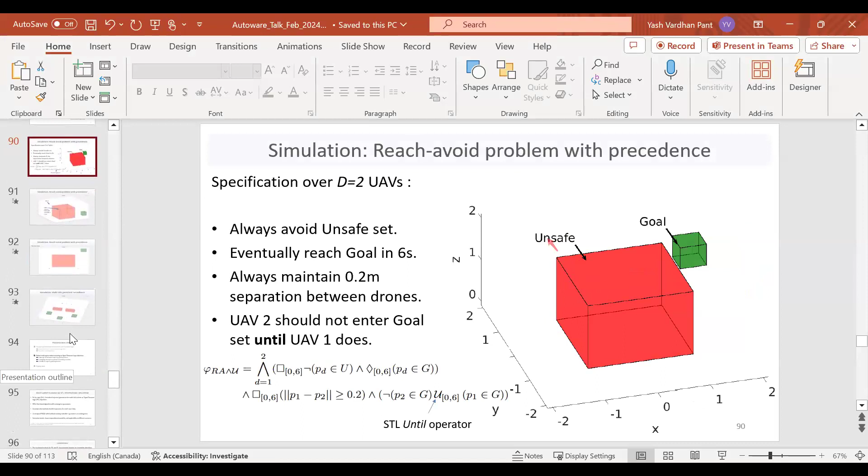We can also take into account more complicated specifications. I guess we're getting close to time, so I'm going to skip all of that, and I'll talk about some of the ongoing work.

All right, before I move on to the ongoing work, let me quickly summarize these methods I proposed for motion planning for multi-rotor systems with signal temporal logic objectives. We propose Fly-by-Logic, first a centralized method that has strong guarantees like kinematic feasibility. We also proposed a distributed method with convergence guarantees and kinematic feasibility guarantees. We can also co-design the planner and controller to have even stronger guarantees, such as dynamic feasibility.

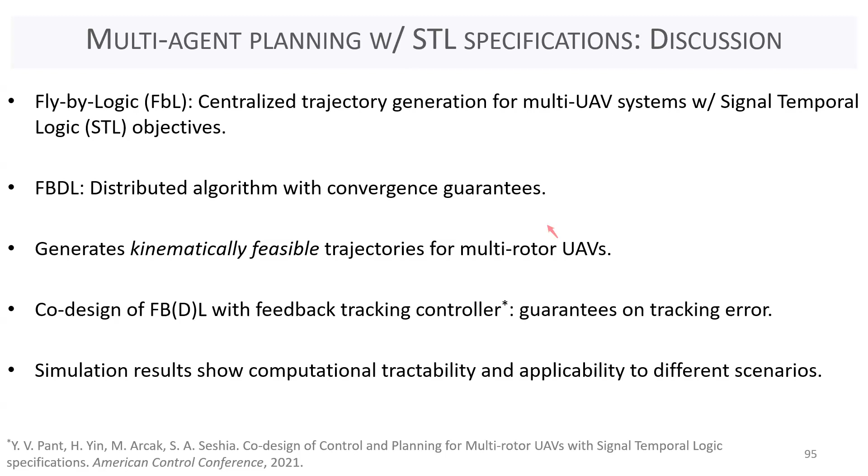One of the main motivations behind these works was that we wanted methods that are computationally tractable and can be applied online to a wide variety of scenarios. Our methods empirically do indeed show that. Also, we can work with the full grammar of STL, so we can create any specification using STL, and our methods can, in theory, solve them. So that's the summary for all this multi-agent motion planning with signal temporal logic.

Some limitations, though: these methods, the STL-based ones, are incomplete algorithms. That is, even if there may exist trajectories that satisfy the underlying specification, there is no guarantee that our methods will actually find them, which is a big drawback when it comes to having certifiably safe controllers.

Also, in the distributed method, one thing I shoved under the rug was that the way these robots communicate with each other is through an instantaneous and lossless method. In practice, we know no such communication medium exists, so we have to study our distributed method and formulate it in a way that is aware of communication limitations. That's part of ongoing work that I probably won't talk about today.

Also, even though initially in my very first slide I'd set out to talk about problems of motion planning with complex objectives in evolving and partially known environments, there is no such evolving or partially known environment in this particular set of methods I talked about. So we can move on to ongoing work where we try to overcome some of these limitations, like including the one Rahul mentioned with other disturbances.

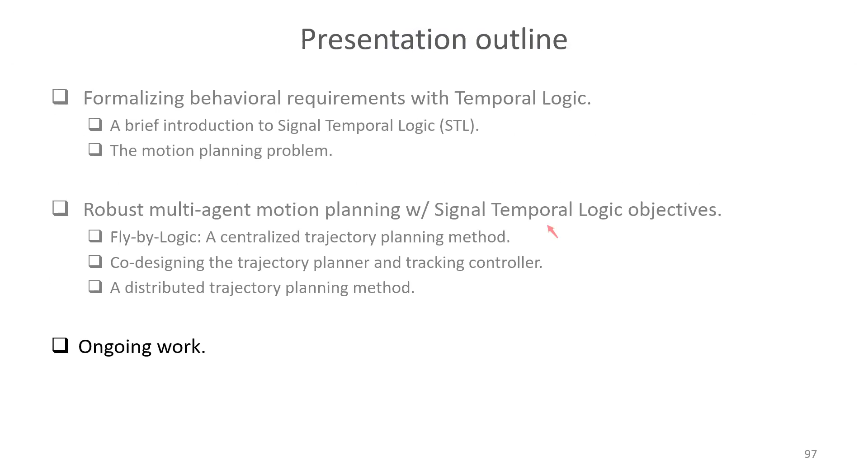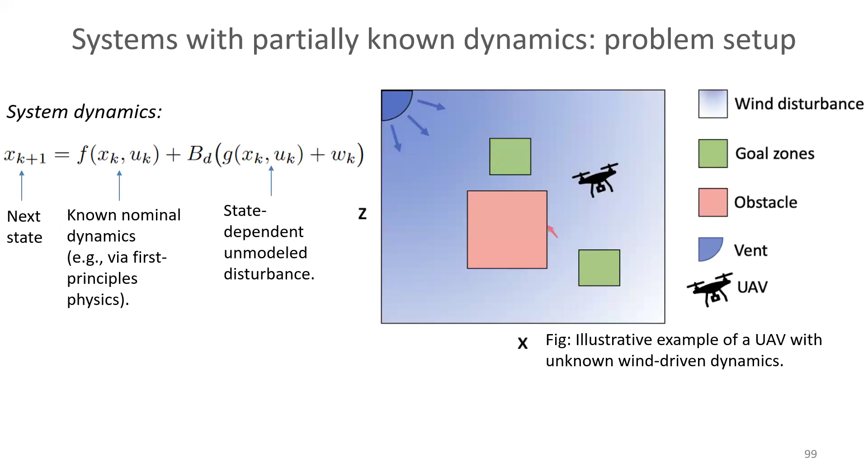The first work is on the control of systems with partially known dynamics, where we want to satisfy STL objectives. For this setup, imagine we have a UAV with dynamics that can be broken down into the nominal or known dynamics and some state-dependent unmodeled disturbance such as wind. The impact of wind depends on which angle you're facing, or your angle of incidence with the wind, and so on, so it's a state-dependent unmodeled disturbance.

Our problem statement is such that we want to find a sequence of control signals for these robots so that they generate a resulting trajectory satisfying the underlying STL specification while being subject to these state-dependent unmodeled disturbances. The way we solve it, of course, is we can't just leave them as unmodeled disturbances, otherwise we're looking at worst case bounds and it becomes a robust control problem.

We've solved this in a data-driven approach. We assume we have access to some trajectories in this particular environment, that is, state and input sequences. What we're going to compute are the mismatches between the nominal model and what the actual state of the system ended up being, which is due to this unmodeled disturbance. We're going to learn these unmodeled disturbances using Gaussian processes.

Using Gaussian processes for model predictive control has been around for a while. In fact, some of the seminal work came from Rahul's lab back in 2017. But what we're going to do is take Gaussian processes for our nominal dynamics and now try to solve this problem of STL satisfaction. I'm not going to get into the details of how we do it.

The work is still being prepared for submission, hopefully to CDC. The idea is that we try to formulate an optimization. We will try to solve this in a mixed integer programming way, but we propose approximations that allow us to solve this mixed integer program in a computationally tractable manner, so we can use this for real-time control. So you can have disturbances acting at a very fast time scale, like changing wind.

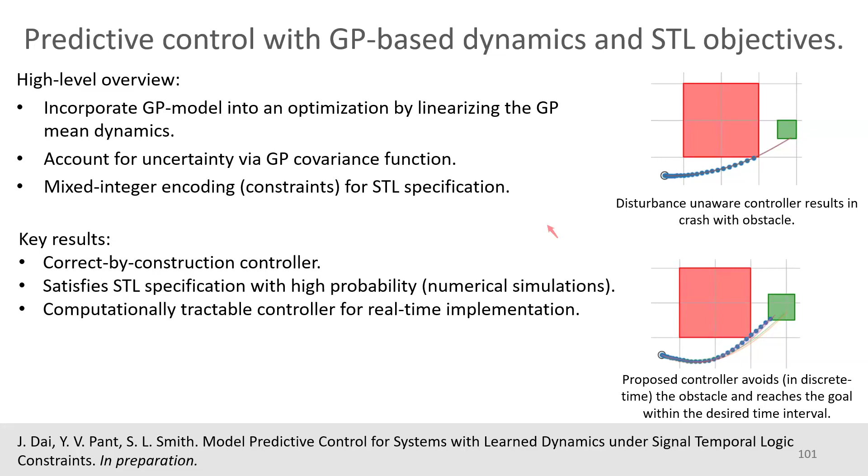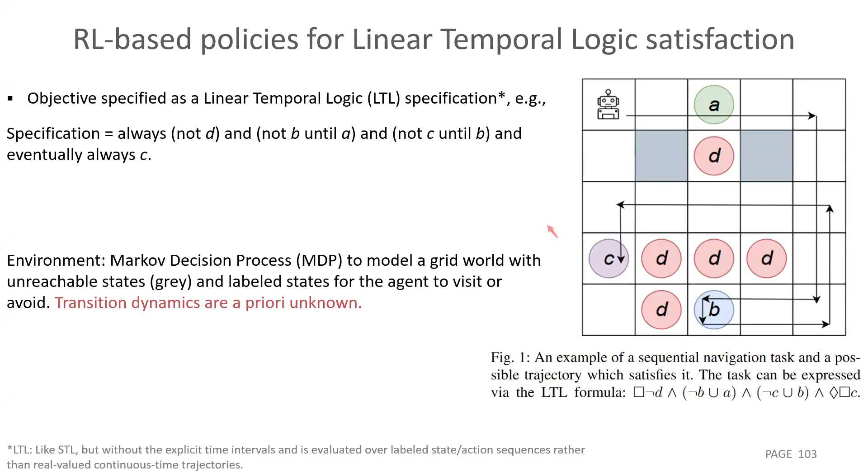Another work we're looking at is where it's not the dynamics that are uncertain, but the environment is uncertain. For that, we look through the lens of generating higher level motion primitives, working in a grid world-like space. Our specifications are given via linear temporal logic. The unknown part here is that we don't actually know the transition probabilities in this grid world we're operating on.

It's a challenging problem. We try to solve it using reinforcement learning, but it doesn't lend itself very naturally to reinforcement learning. I can talk about these details later if you're interested.

What we propose is a method inspired by self-play, the class of algorithms used for the game of Go, or AlphaGo. But this is not a self-play problem, so we take that type of approach, turn it into a single player problem, and come up with policies, or a method from which we can extract policies after training, to produce higher level behaviors that satisfy an underlying LTL spec.

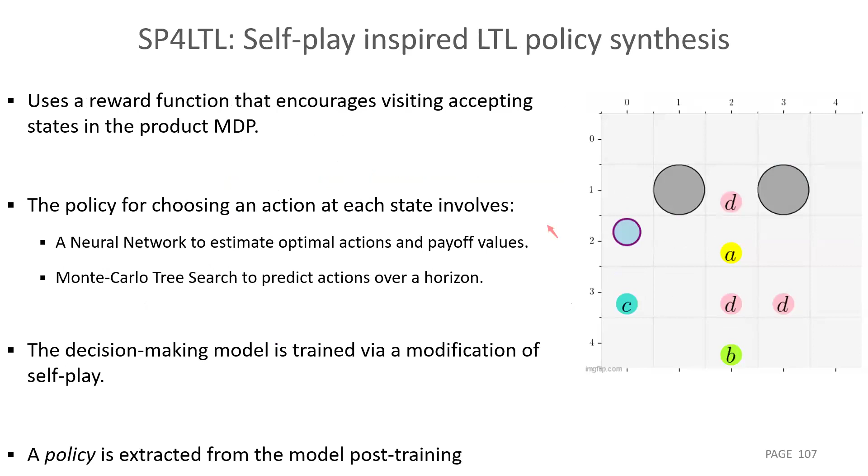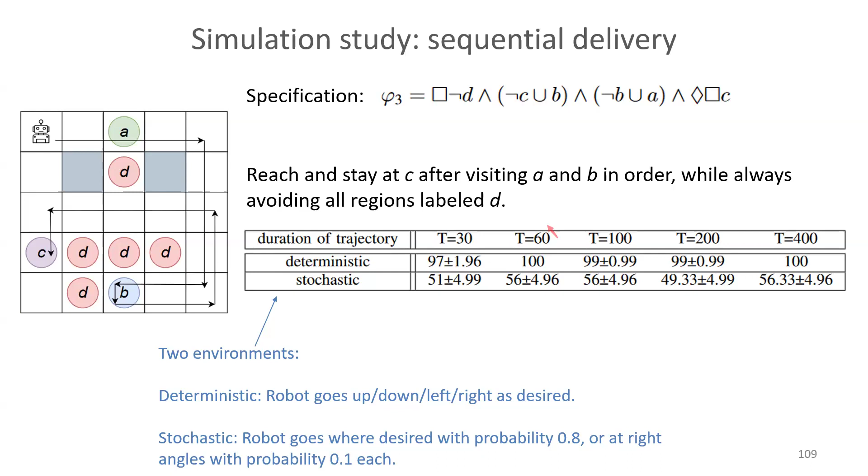We beat some state-of-the-art benchmarks, including much more recent ones. I don't have all the slides for that. We can also satisfy specifications that state-of-the-art methods could not satisfy, even in environments where we do not know the transition probabilities, or where a robot could end up doing something it wasn't planning for, but our method is still robust to that.

I'm going to skip all of this. But what we're trying to do now is take some of these methods and apply them to a more realistic problem rather than just working on simple grid worlds, and also make them robust to adversarial environments.

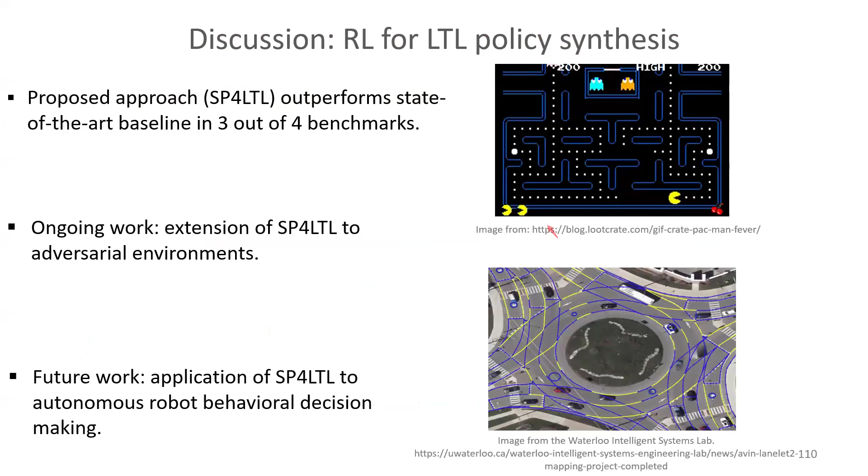A lot of our work is on taking the methods I'm developing and putting them on ground robots. One is a Jeep Grand Cherokee we have through a collaboration with Magna, running Autoware on it. The Jeep itself is giving us a lot of problems, so once we fix those, we expect to have a few Autoware demos done by the end of this term.

There's other research I did not talk about, implemented as trajectory tracking controllers, with special focus on working in difficult environments like the one shown here, which is very common in Waterloo, with ice and snow on the roads. We also work with multi-agent or multi-robot experiments with this LimoBot, and we're focusing on the problem of going fast and drifting as part of F1Tenth.

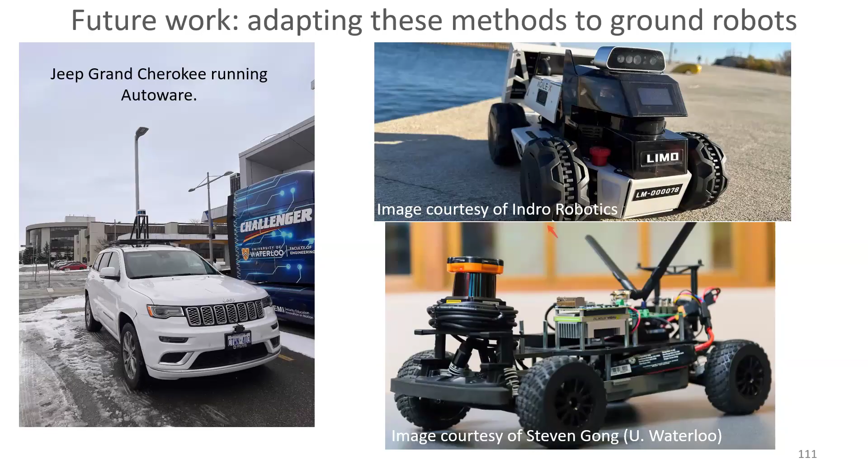So I guess with that, I'll stop and leave some time for questions. Thank you all for your time, and I hope you got something out of this. Thanks.

Thank you, Yash. So we have time for some questions. Quick question? Yeah.

Do you need then a centralized control or at least monitoring so the agents know the position from each other, or do they transmit this on a mesh like in near real time?

I see, that's a good question. So it depends on how you want to use this planner. If you want to use it as a one-shot offline planner, all we need to know are the initial positions of the robots, so the centralized planner should know the initial state of all of the robots. We can also run this online, and in that case all of the robots should actually be sending their positions back to the centralized controller. So the assumption is the centralized controller knows everything at all times.

For the distributed one, we do assume a mesh network where they can all talk to each other, and in that case they actually need to communicate their solutions with all the other robots that are part of the same specification.

Nice, so one more. Then, yeah.

What if it happens that I'm actually reporting my position incorrectly? Is there a way you could add one more variable, say, hey, I have 2 or 3 agents that observe the position for, let's say, agent X plus 1, and that's not really their position, so it's actually an incorrect position that was reported. But then you have 3 other agents that...

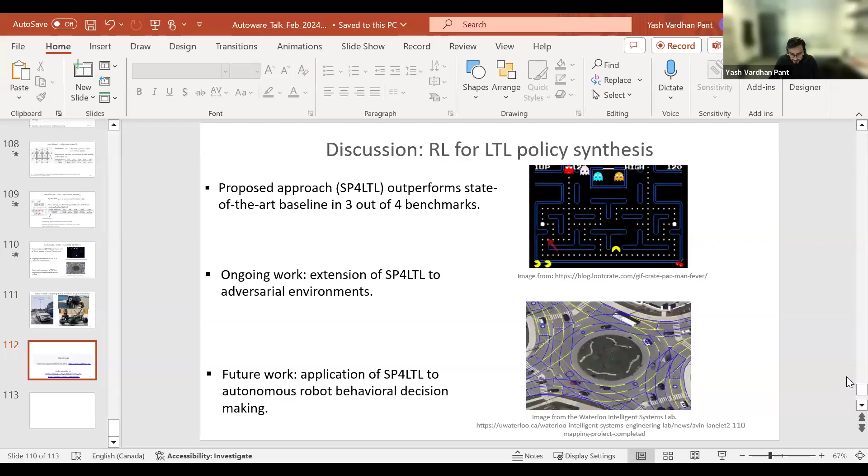Okay, thanks. So maybe another possible one is traffic disaster management, where it's not necessarily that you need a building map, but we know the roadway map of the system. So, going back to the previous question, about information sharing and the protocols there, is there still some advancement needed in terms of technology readiness?

Yeah, I think that's more of an application where this could perhaps be applied. Again, the challenge would be that the environment is maybe not known perfectly a priori, and these type of methods would still struggle with it, but that doesn't mean it's the end of these methods. In fact, there's work from MIT a couple of years ago called barrier net, which essentially takes control barrier functions, or a neural network trained to behave like a control barrier function, that can be used as a filter for whatever our methods are proposing. What that would mean is if there are parts of the road network blocked that we did not know about before, the barrier net would take care of these new unsafe zones, whereas our method would continue to provide the higher level trajectories for what's going on. So you could stitch together methods, including ones I propose, other work, and come up with a solution.